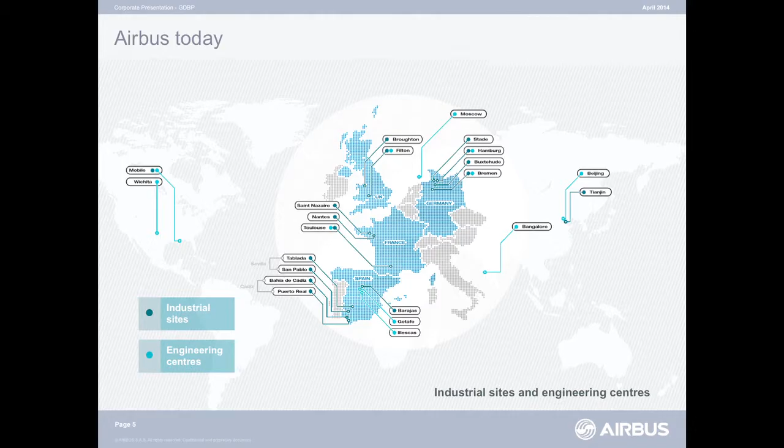And where are those people? Well, this is the core of where Airbus works across the UK, France, Germany and Spain. That superimposition of a larger Europe on top of the world can show you the other places we operate in the world. We actually operate 90% of our business outside of Europe. And before anybody asks any questions, Moscow, just being off the coast of Germany, is to do with how the map has been superimposed. It's not a political statement. I don't want to make any political statement.

And what do we make? We make planes. We make aircraft. We make civil airliners. And we provide a comprehensive range of civil aircraft, from the small A320 single-aisle type aircraft, which you might fly in if you were flying from here to a destination in Europe. Or now we've improved the efficiency, you could fly it transcontinentally across the United States.

We also provide longer range aircraft like the 330 and our new A350 extra wide body, XWB, and the flagship of the 21st century, the Airbus A380, the double-deck aircraft, which can seat up to 800 passengers, well, not in a three-class configuration 800, but standard is 555 in a three-class configuration. So we make planes of various different sizes, from the ones that you're probably familiar with to some of the larger ones as well.

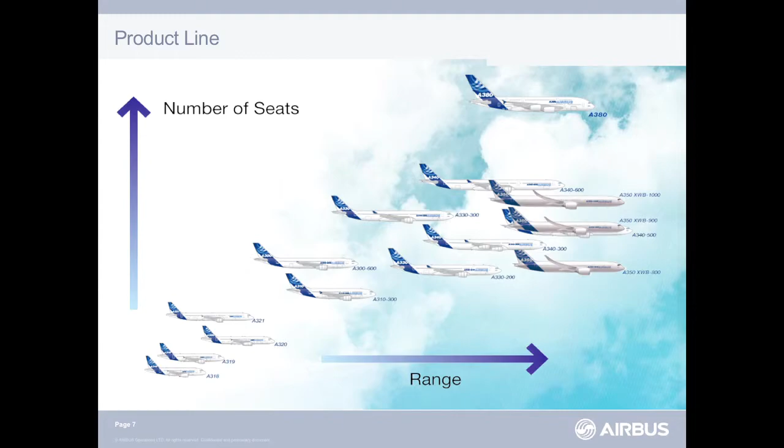I like this slide. It kind of shows our aircraft range, how far they can fly against how many people you can fly that distance. And as technology improves, of course, the range improves, and so we can get more people further with a lower environmental impact, hopefully. So you'll see these are corporate slides because the graphics are very good. You'll know when it goes into my slides because the graphics go downhill quite a bit.

So the future of aviation, what does the future hold? Oh, I've lost my notes on that one. I'll have to ad-lib. Not that I have been already. The future.

I saw a video that Airbus produced called "The Future by Airbus," and at the start of the video, it talked about how the future of world transport would be super green, super environmentally friendly, and it would still do the same thing that the aircraft can do. And it conceptualized this idea of having diamond rails stretched across the globe and transport in the form of what look like trains transported by magnetic levitation or something like that across these diamond columns wrapping around the world.

But then it said, well, we're not quite there yet. In fact, we're quite some way away from that yet. And so for the foreseeable future, if we want to maintain the standard of living, the interconnectivity, the social, the economic aspects, then what we're going to need to do is look at the way we make aircraft now to take into account a lot more the environmental aspects. So from a sustainability point of view, what is Airbus doing?

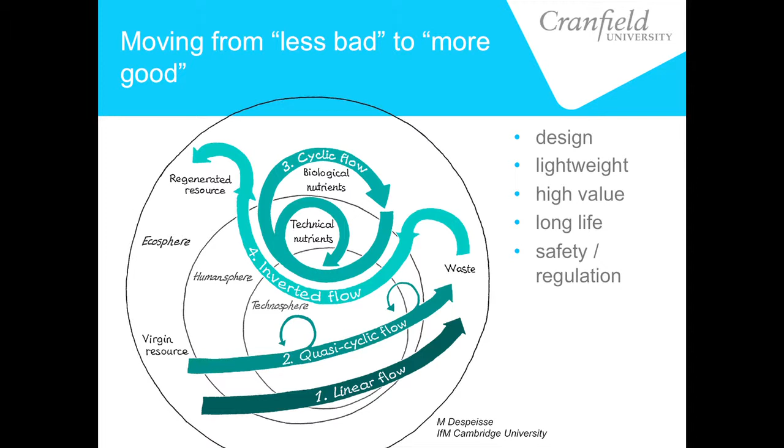As Steve Hope said about Toyota, if you're going to buy a new car, you're not going to want materials that have been used in previous cars necessarily in your car. And for regulatory as well as safety reasons, you're going to be pretty worried if Airbus have said they've recycled quite a few bits of their wings and so forth in the airframe. But these are long life, high value products. And so there is a lot of circulation of resources within existing platforms, and that's something that the aerospace industry is very good at. I won't dare to go on to number 4.

I'm going to plant a few seeds here on this movement from lean and further on. We've spent many decades, 40 years more, looking at lean and developing lean and improving that type of process. If it's going to take us that long to optimize that side and spread the message throughout industry, how are we going to move to the other stages?

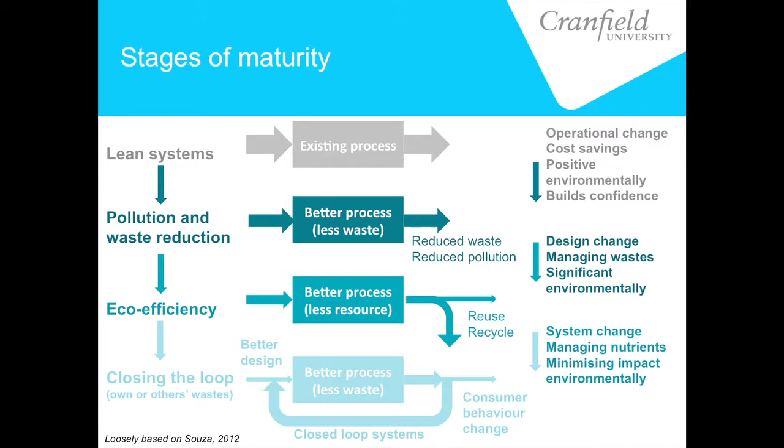The second seed I wanted to jump to then very quickly was this movement from lean through pollution prevention to eco-efficiency and beyond. Is that just incremental? Are we just improving little bits, and can we make that journey just by making all those little improvements, and therefore we can use our existing, you could say, Western innovation patterns, or do we need to make the step change? So that was one area that we wanted to plant a seed of. How do you make that step change, and can you use existing techniques? So with that, I'm going to very quickly pass across to Peter, who will present a final slide.

And that was the awareness campaign launched by our facility management colleagues, and that's what formed the energy multifunctional team. So focusing very much on the specific topic of energy efficiency, getting more towards that factory level, a lot of engagement with the factories, but mainly focused in the facility management perimeter, so improving building lighting, not so much in a real, truly factory perimeter, but still good progress and starting to cascade the objectives towards real achievements.

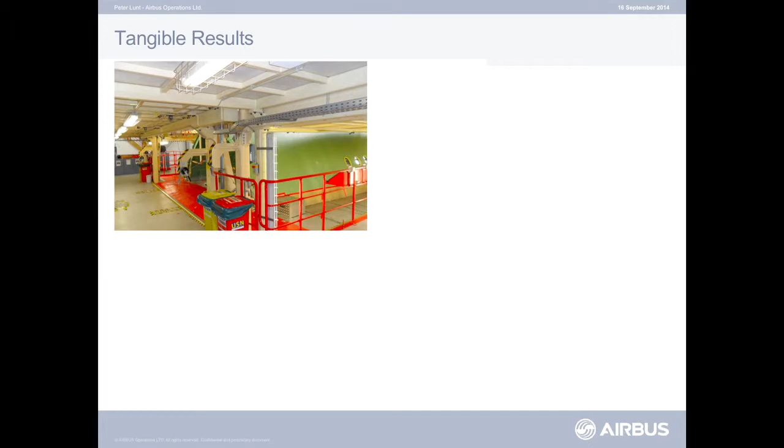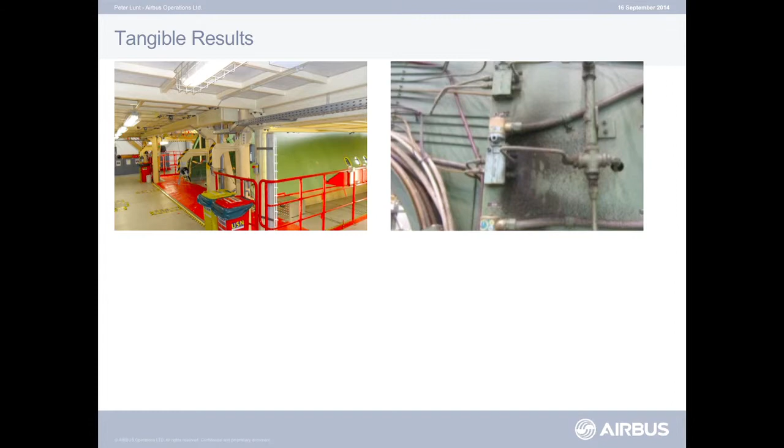In terms of what has the network done, some results over the past year. So the first year of implementation was 2013. We carried out a project in one of our sites in Germany looking at lighting control. So we were able to install some motion sensors to react to when people were there and where they went. Very simple project. Compressed air. A few people have mentioned compressed air today. You can't really get a picture of a compressed air leak, but I think this is probably one where you can see the leak with the marks on the side of the machine there. So a big compressed air leak detection and repair campaign carried out across all the sites actually.

Painting, that's an air handling system outside a paint shop. So we carried out a project where we looked at the fan speeds and how the fans were controlled, and we installed some variable speed drives, not shown there, and we were able to make sure that the paint booth was operating at appropriate conditions.

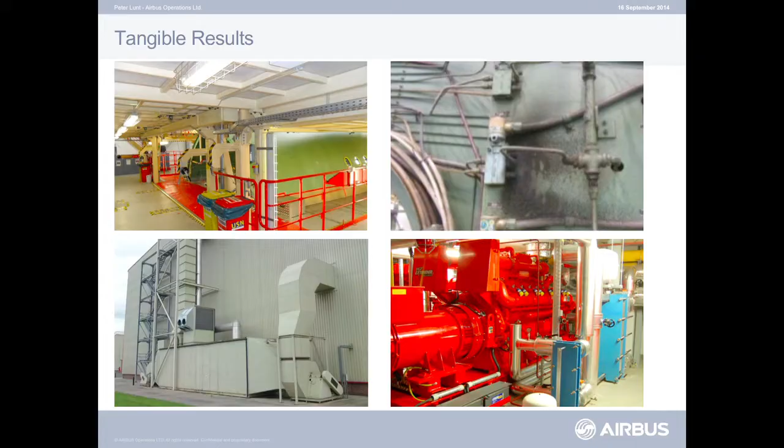And a very interesting project, another one in Germany, thinking of waste as food. That's a CHP, a combined heat and power plant. Those of you who know what a CHP is are going to say that you produced electricity and used heat as a waste product. Well, no, in this case, the heat and the electricity were both the waste products. What we were producing here was exhaust gas, which was then treated to inert some pressure vessels. Other sites, and this site, had previously bought in expensive nitrogen, or had sucked nitrogen out of the air through very energy intensive processes. But what they did here was, when we burn gas in air, we get rid of a lot of the oxygen. So we've got an atmosphere which is suitable for use in the pressure vessels. So we use the exhaust as the primary output and then heat.

Okay. I've got to close there?

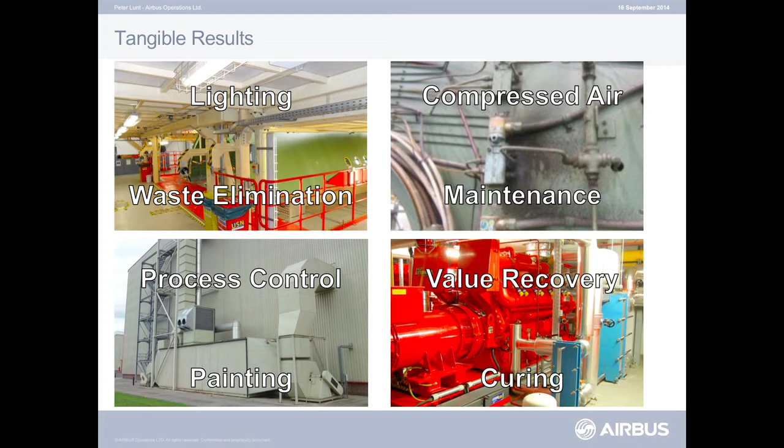Okay. So you can see the 4 different areas we've been looking at. You can also see the types of activity that we've been doing, and there's a kind of a flow between these which links to the flow of the methodology.